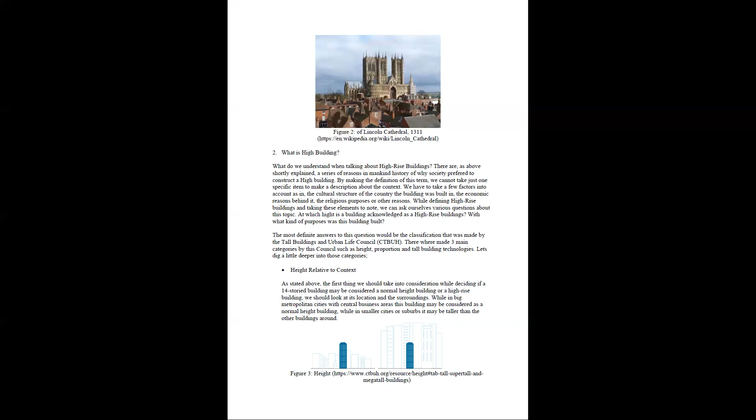The second point would be the proportion. Not only does the height of the building play an important role in defining its status, but also its width. A building may not be particularly high but very slender to give the appearance of a tall building, whereas a building with a large footprint and wide size areas may not be classified as a tall building at all.

The third category would be technologies relevant to tall buildings. If a building has specific traits such as vertical transport technologies or structural wind bracing as a product of height, it can also be considered a tall building.

As we continue with this video, you will see the big differences between buildings made in different years, differing from each other in the technologies used. With growth in technological inventions, buildings also started to grow higher towards the sky. In comparison with history's first tall buildings, we can see that due to lack of knowledge and possibilities, serious problems such as water pressure and the absence of an elevator were the main reasons which prevented us from building higher. In conclusion, technological development always plays a big role in our possibilities when building and constructing.

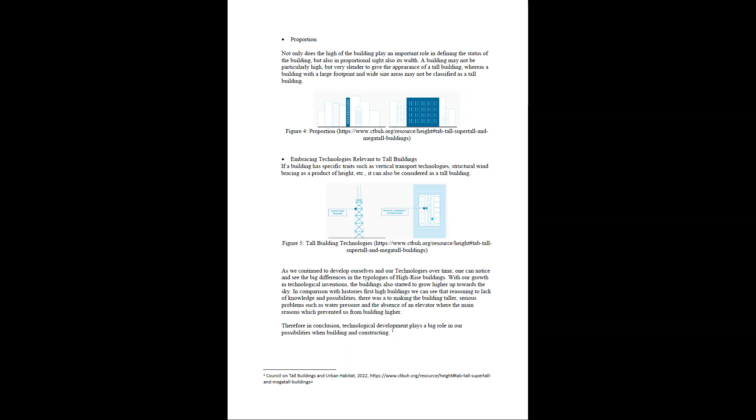Let's take a short look at the historical development of tall buildings. When we look at tall buildings in history, we see a rapid change at the beginning of the 20th century, when we started to develop glass technologies, high quality concrete, and steel as new possibilities of material that could be used in high-rise buildings.

With those technologies, problems like post-stress, corrosion, resistance reinforcement, composite systems and materials, elevator systems, water pumps, heating, cooling, and ventilation systems could now easily be solved with this new approach. And the most important thing would be the computer programs we use in construction, which make a really big difference, because now we can solve complex calculations, wind and earthquake resistance, or design different forms that are more transparent and higher.

Now we continue with the examples of high-rise buildings in Turkey. The first ever high-rise built in Turkey's history is the Kahramanlar Business Center, formerly also known as Kızılay Emek İşhanı. The architect of this building is known as Enver Tokay. The building was made in 1965 in Ankara. It's a 76-meter-high, 24-story skyscraper.

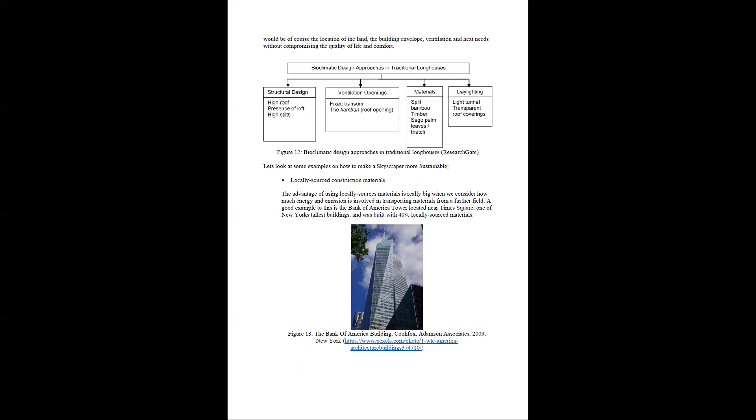Also important, of course, are the location of the land, the building envelope, ventilation, and heat needs, without compromising the quality of life and comfort. Let's take a look at bioclimatic design approaches in traditional longhouses. Structural designs are a high roof, presence of a loft, and high stilts. Ventilation openings are a fixed transom or the kanban. Materials we could use are split bamboo, timber, sago palm leaves, and thatch. Daylighting can be achieved with light tunnels and transparent roof coverings.

There are some more examples of how we can make a skyscraper more sustainable. One of those, and probably one of the easiest things we can do, is locally sourced construction materials. If we use locally sourced construction materials, we are not going to transport materials from further afield, and this helps us in saving energy. A really good example of this is the Bank of America Tower, located near Times Square. The architect of this building is Cook+Fox with Adamson Associates; it was built in 2009 in New York. The building was made with nearly 40% locally sourced materials.

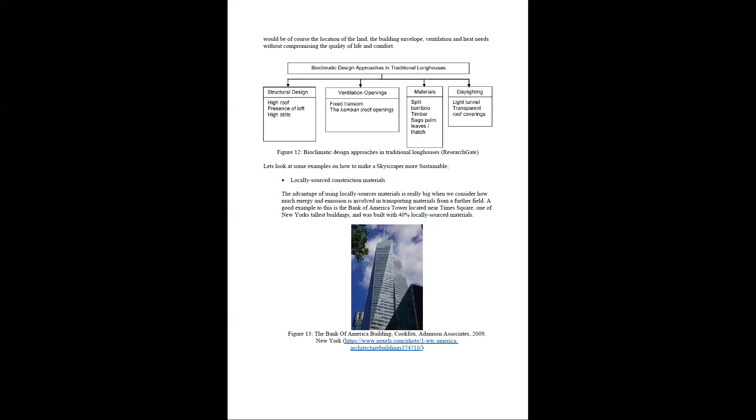Another point is wind-resistant design. For this, we have the example of the Shanghai Tower, made by Marshall Strabala and Jun Xia, TGAD, built in 2015, located in Shanghai. This tower is 632 meters high and stands up against intensive wind conditions at its highest point. The curved spine of its design was ingeniously incorporated in order to redirect wind force, allowing for a less resource-intensive construction.

Another thing to make a high-rise building ecological would be green buildings. This example is in Singapore, made by WOHA in 2016. The name of this construction is the Oasia Hotel Downtown. It's literally a green building, the design itself, with vertical gardens and green vegetation on the whole structure of the building. The aim here was to reduce the building's carbon footprint and creating a beautiful, relaxing, and natural environment for residents.

We can also use wind turbines when we build high-rise buildings. This example is located in Bahrain, was built in 2008 by Atkins. It's the Bahrain World Trade Center. It's a perfect example on how to use the building efficiency while saving on energy. It's a 240-meter high building in a Middle Eastern island and was inspired by traditional wind towers.

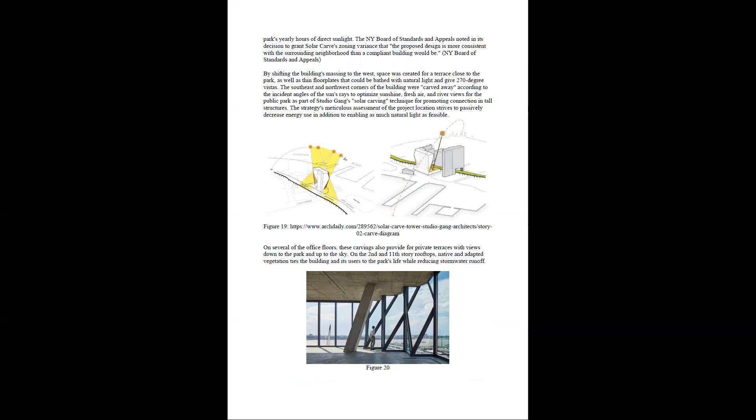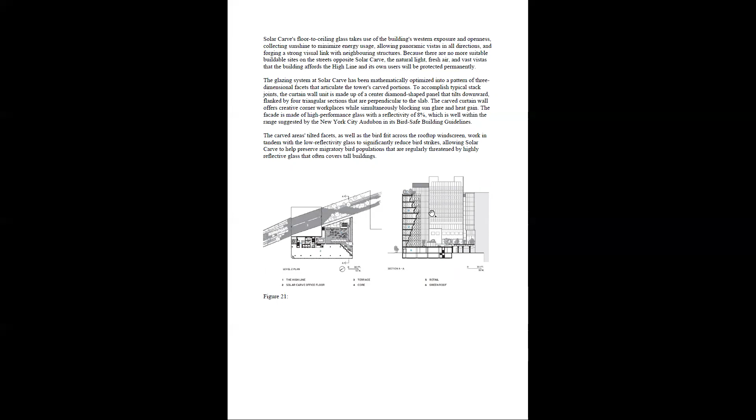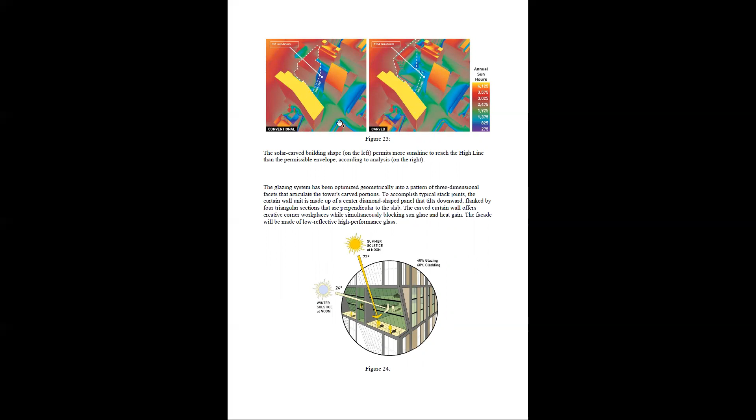On several of the office floors, these carvings also provide for private terraces with views down to the park. Solar Carve's floor-to-ceiling glass takes use of the building's western exposure and openness, collecting sunshine to minimize energy usage, allowing panoramic vistas in all directions, and forging a strong visual link with neighboring structures. This is a floor plan on the located area of this building, and this is a section of it. Here you can see the Solar Carve building shape permits more sunshine to reach the High Line than the permissible envelope according to analysis.

The next example is the UN Tower. It was made by B+H architects. The design proposal of this building is adaptable to an ever-changing cityscape. It's a building that was not built yet. It's a building design proposal that we can take and we can rebuild it in any place, in any shape, with any materials that we want to, wherever we want to. It's a really sustainable project, and we can use it as accommodation or a commercial building. It's up to us how we want to build this. We can change it like we want to.

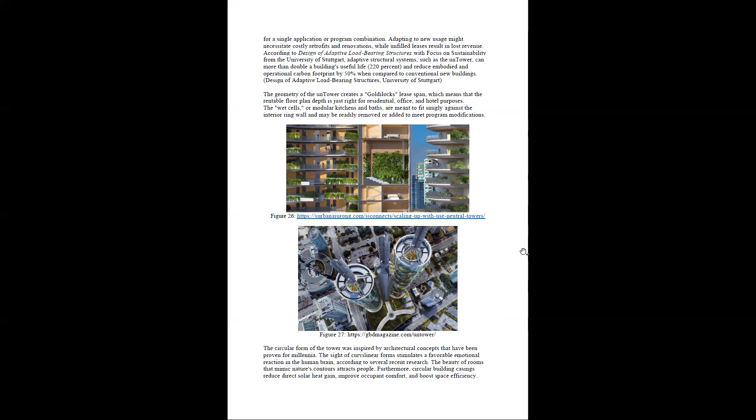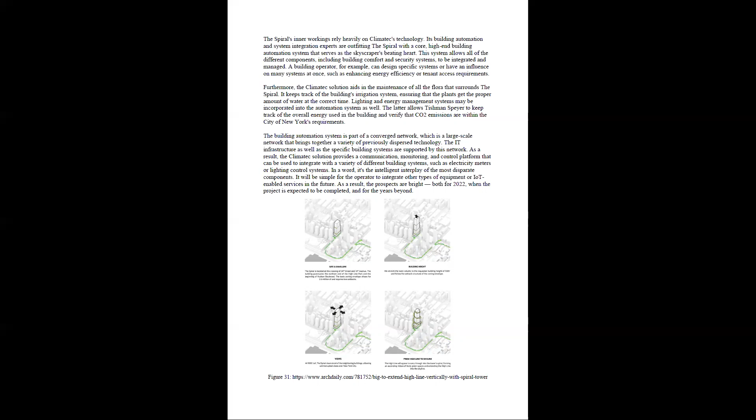In New York City, we have the important High Line. The High Line is a green, let's say, band that continues in the middle of the city and ends at the place where the building was located. So with the geometrical form of that building, the High Line is going to continue up to the top of the building. And on each floor inside of the building, you can have access to the indoor gardens.

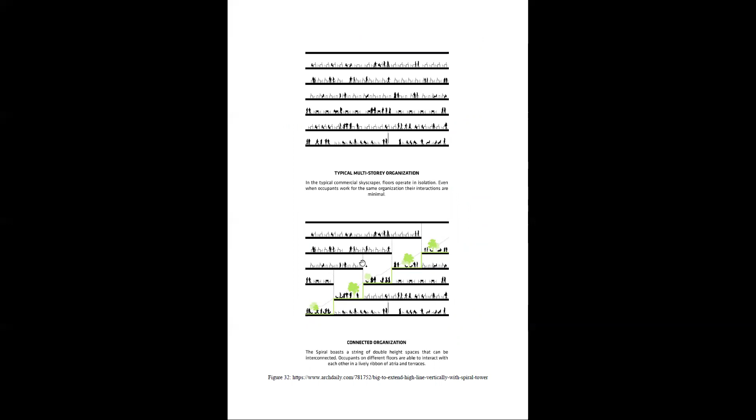This is an example of it and a closer look at how these floors work with each other and how the indoor gardens are connected to each other. The next example is One York in Toronto. The architects are ERS Architects. It was completed in 2016 and is located in Canada.

This building is using Enwave Deep Lake water cooling treatment. The building is basically connected to a lake nearby and is using a pump system to bring the water inside of the building, and use it as a cooling system and a heating system. Rainwater is also collected from enormous cisterns as well as neighboring towers and utilized in drip irrigation as well. And the water that is collected is going to be used in toilets and urinals inside of the building.

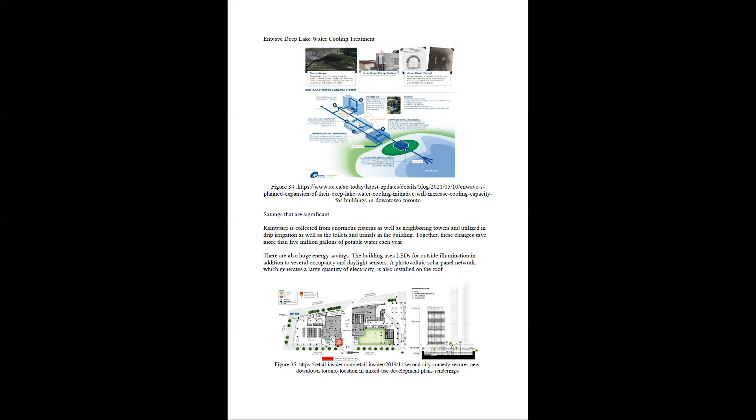LEDs for outside illumination in addition to several occupancy and daylight sensors. The building has a photovoltaic solar panel network, which generates a large quantity of electricity, also installed on the roof. These are the tasks that were completed inside of the building and around it.

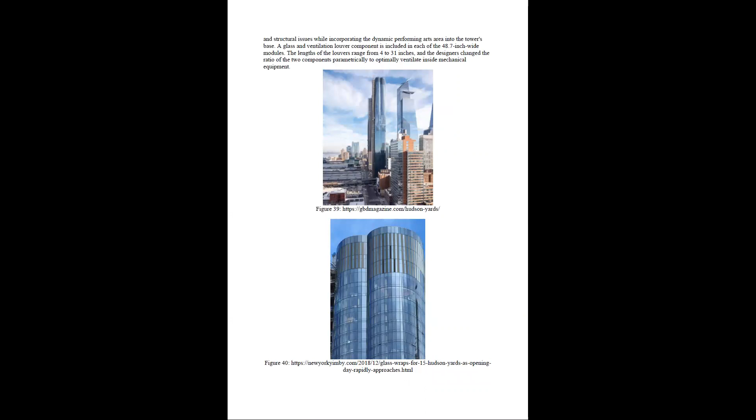The next building example is Stantec Tower, made by Stantec, located in Edmonton, Canada, completed in 2018. It is one of Western Canada's tallest structures and part of the country's largest mixed-use developments. It also has a LEED Gold certification.

Our next example is going to be the Hearst Tower. The architects of this tower are Foster and Partners. The building is located in New York City and was completed in 2006. It has a complete height of 182 meters. Hearst Tower is the first green high-rise office skyscraper in New York City, and it reflects Foster and Partners' creativity in creating a groundbreaking architecture.

The structure was constructed by using 85% recycled steel, and heating and air conditioning systems use outdoor airflow for cooling and ventilation for 9 months of the year. That means it uses 25% less energy than an identical office building that meets the state and city's minimum requirements.

The building envelope incorporates high-performance low-emission glass with inbuilt roller blinds that are deployed to decrease glare and reduce solar gain. Because the building is naturally shaded by the surrounding structures, enormous skylights at the podium level were employed to provide light into the atrium space. Here we can see a structure of the building, a picture of its outside and a good site plan.

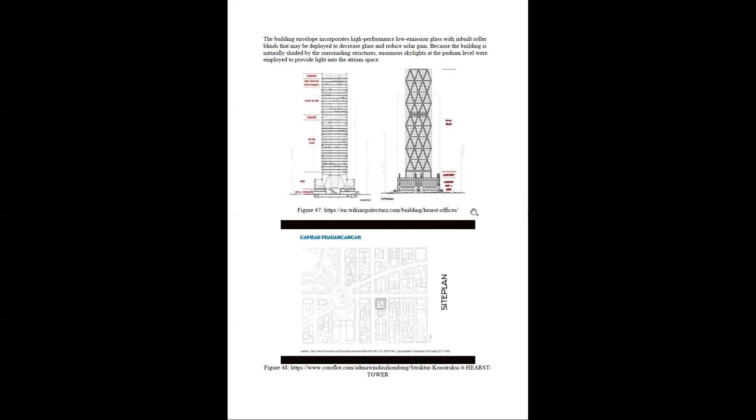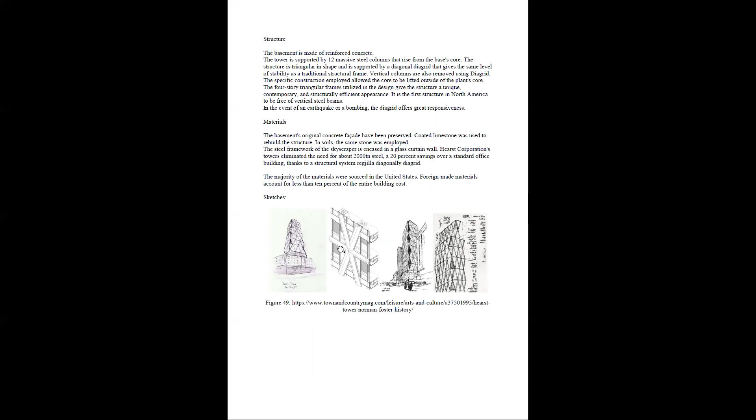In conclusion, with the changing and developing technologies, it's possible to make our world more livable and more sustainable with many different methods. With the spreading and increasing population, we started to take up a lot of space in the world. To use less space in future, the use of skyscrapers will become more useful and almost mandatory.

In this case, the problem we need to address is how much of the materials we use when building a skyscraper can be taken from nature, how efficiently we can use the space we get from nature, and how much we can integrate energy sources that will not run out in nature into the building. We can benefit from solar and wind energy by minimizing the energy use inside the building.

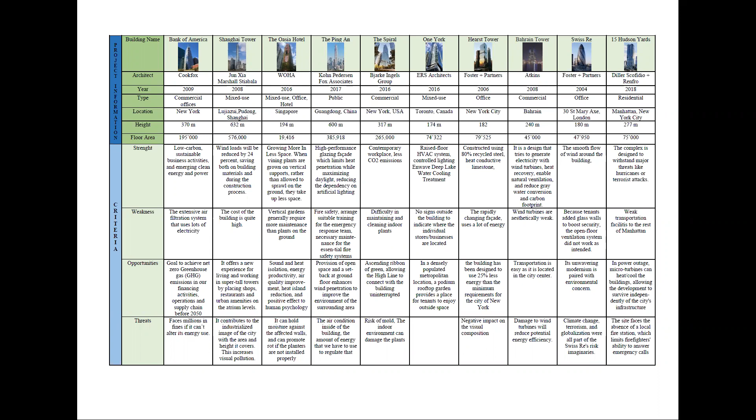The last part of this course is going to be my own project, my own proposal of a high-rise building. We have made a detailed review and criticism of the tall buildings, and we will begin to shape our sustainable high-rise building proposal under the best conditions. In the complex program, the main idea in the design process is to make an adaptable design with a use-neutral complex plan. After design and planning, program, tenant, and usage modifications can be accommodated.

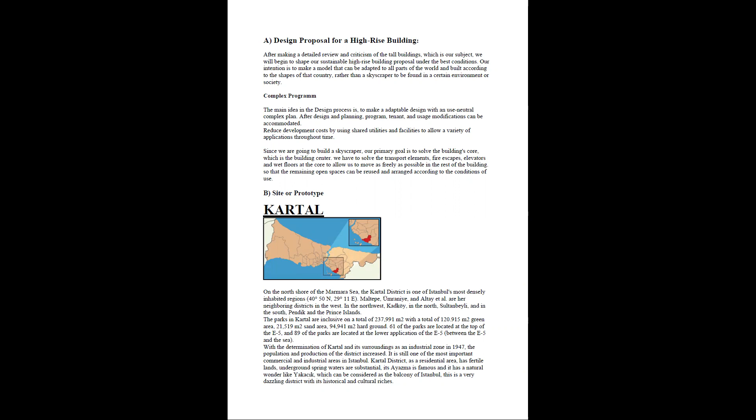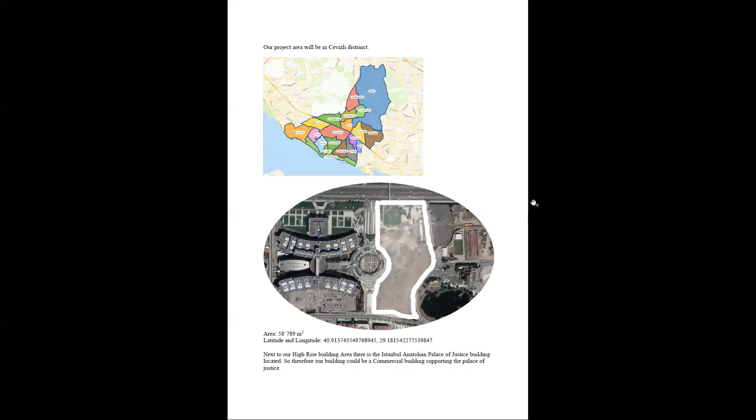The site is going to be in Kartal. We are going to work in Kartal. Our project area will be located in Cevizli district on this area. Next to our high-rise building area, there is the Istanbul Anatolian Palace of Justice building located. So therefore, our building could be a commercial building supporting the Palace of Justice.

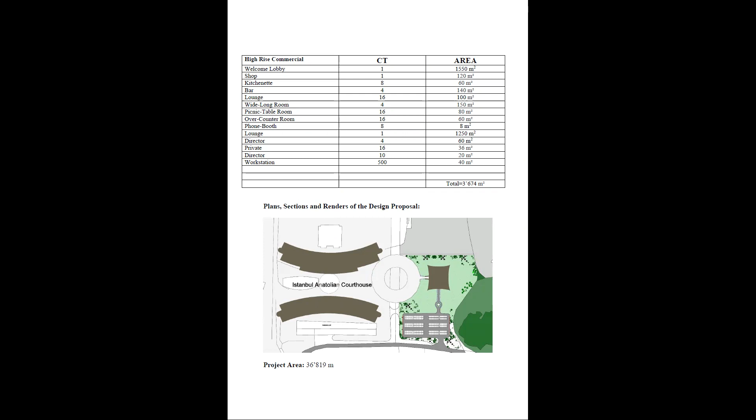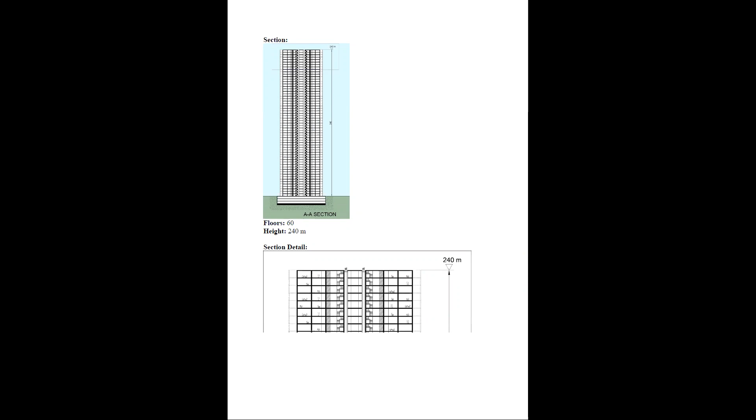Here we have a list of the requirements in our building. Now we are going to see some plans, sections, and renders of the design proposal. This is the place where our building is located. This is a simple site plan that I made to show you a little bit more of my project. The most important part in this building is the core plan. Here you see a section and the section detail of the building. The height of our building is 240 meters tall and contains 60 floors.

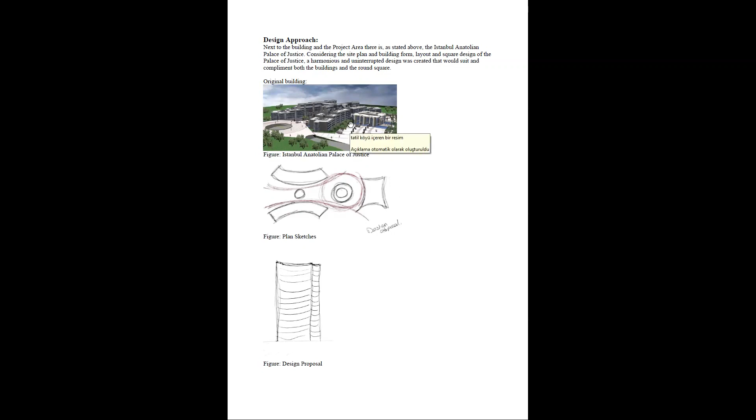The design approach. Next to the building and the project area there is, as stated above, the Istanbul Anatolian Palace of Justice. Considering the site plan and building form, layout and square design of the Palace of Justice, a harmonious and uninterrupted design was created that would suit and complement both this building and the round square. The original building is in the figure as shown. These are my sketches that I tried to make while deciding on the construction's form.

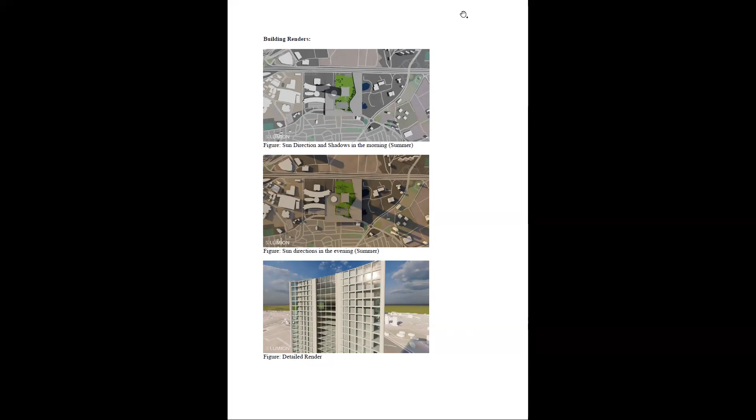Here you see some building renders with sun direction and shadows. The top of them is in the morning in summer, and the bottom is sun directions in the evening for summer.

Now at the very end, I'd like to show you some render pictures of the building and close the video. Thank you for listening.